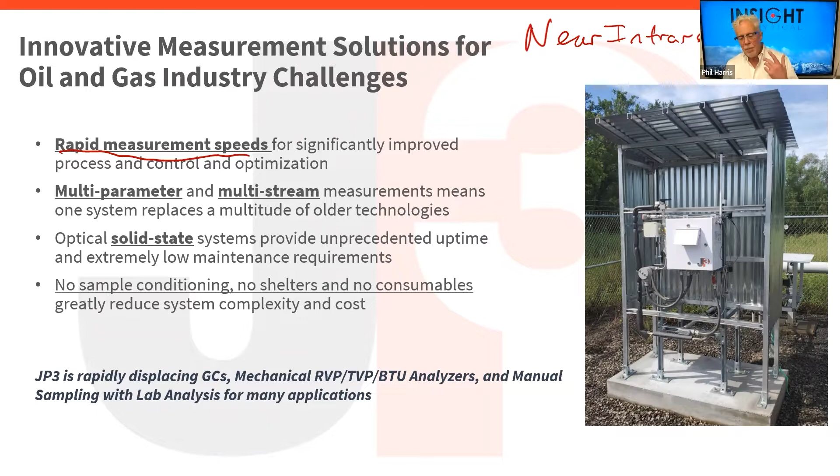It's capable of doing multi-parameter analysis, and this is especially important in that it can allow us to do chemical composition, much like we might think of doing on say a gas chromatograph, but it'll also allow us to do physical properties, where we might have expected to have to use a dedicated physical properties analyzer. So we can do both compositional analysis as well as physical properties off of one measurement, off of shooting one beam of light across one sample.

It comes down to using different algorithms. Also, because it's fast, we can switch streams quickly and do multi-stream analysis, so we can use one analyzer to do what multiple analyzers might typically have been doing.

It's all solid state, no moving parts except for one that's built inside kind of an IC, a tunable Fabry-Perot filter, if you like. So what it means is that it has no moving parts. There are no parts of the actual spectrometer that are in contact with the fluid, except for a flow cell that we're going to talk about in a little bit.

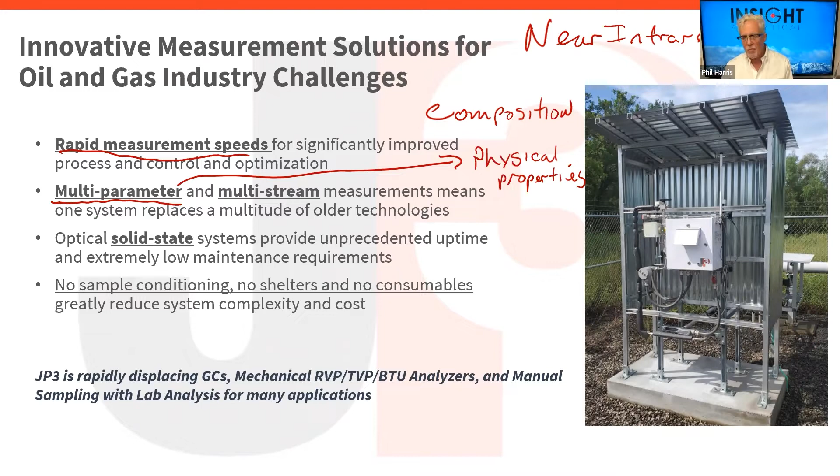The JP3 Verax family of analyzers are optical spectrometers that use advanced data processing techniques, what we often refer to as chemometrics—chemo coming from chemistry, metric coming from measure—using mathematical algorithms to look at an infrared spectra and pull chemical data, measurement data, out of that spectrum and allow it to be used for process control. It allows us to do a wide range of measurements in near real time and at process operating conditions.

So one of the important things to realize with this technology is we don't tend to have to put in things like regulators or control pressures or change temperatures.

We typically run the sample directly at process operating conditions. And what that means is, assuming the sample was single phase when it was in the process, it's single phase now when it's in our analyzer.

This is really important because in a lot of our traditional analyzers, we'll mount an analyzer building far away from the process, bring a sample over there, and perhaps do things to control flow rates, temperatures, and pressures. It's one of the things we commonly do in sample conditioning. But every time we have a temperature or a pressure change, we have a possible phase change as well. So by running at line conditions, we can try to make sure we keep the sample in the phase that we want to do the measurement in.

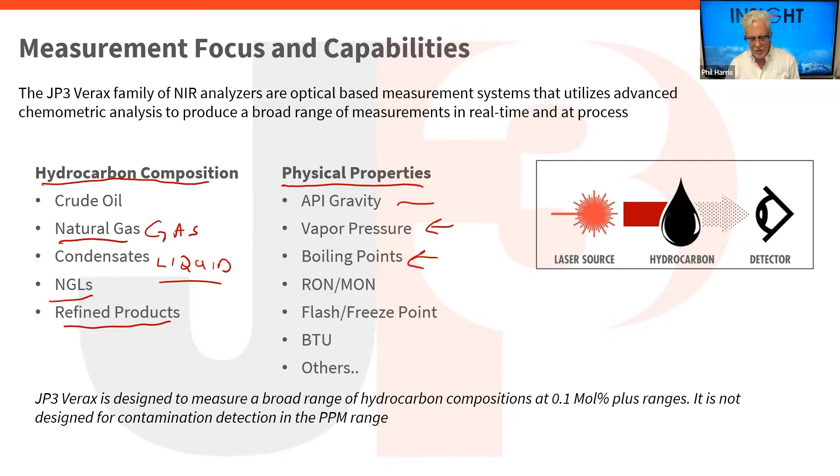So the way it works is we'll have a process line, some chemical process, whether it's a crude oil plant, whether it's product NGLs from a deethanizer bottoms, whatever. We have sample continuously flowing through that process line, and we look for some source of differential pressure. It might be something like an orifice plate.

So we have sample flowing through that process line, creating some differential pressure across that, say, orifice plate, or it could be a pump or a process filter. We use that differential pressure to drive process fluid through what we refer to as a flow cell.

This is where the fluid flows through essentially a stainless steel block that has two sapphire windows in it that we're shooting the beam of light across. We mount the analyzer someplace else, remotely, connect it to that flow cell via fiber optics, and shoot a beam of light over the fiber optics and let the beam of light come back to the analyzer. So I usually refer to this as being the brains of the whole device.

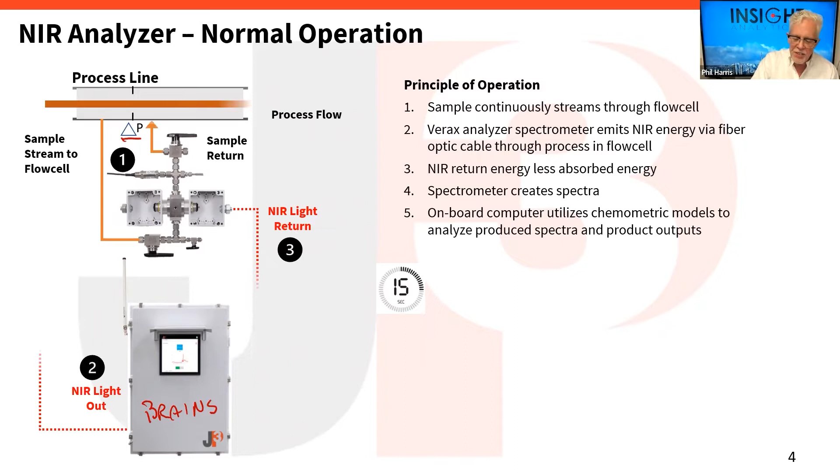The important thing to realize is that any process fluid leaving the process is returned right back into the process. We can mount this close to the process because it's going to run at process line conditions anyway, so we may as well have it as close as possible. That lets the fluid flow quickly, and no fluid flows over to the analyzer. So wherever we put the analyzer, we don't have to worry about things like toxic gas detection, or carrier gas and oxygen deficiency.

It allows us to put that analyzer at some place like an MCC building or a control room. The onboard computer then looks at the light that comes back and makes an analysis. So essentially what we do is take the spectrum that comes back—this is the NIR spectrum. We take that near infrared spectrum, run it through the algorithms we've built into the analyzer, run it through the models we've built, and use it to predict chemical composition.

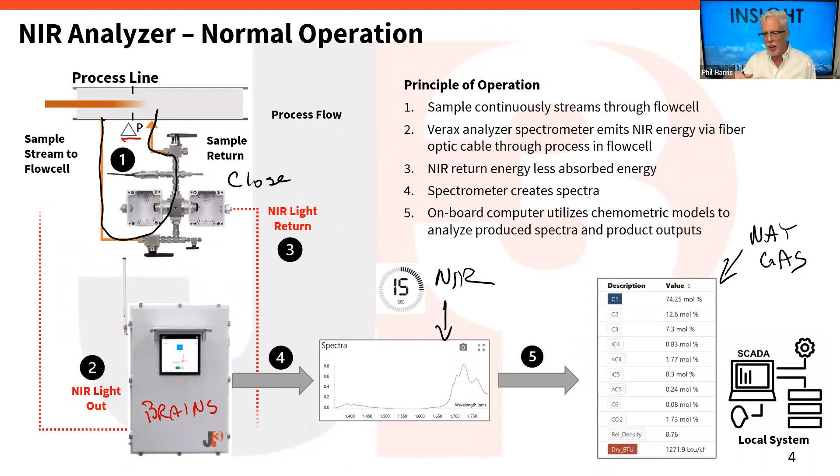For example, in this case we've shown a wet natural gas type sample. But it could be crude oil, condensates, NGLs, refined products like gasoline. Since one analyzer can handle multiple flow cells, we can put one unit in and have different flow cells measuring different things in different places. One flow cell might be measuring a natural gas sample, another a crude oil sample, and still another a natural gas liquid.

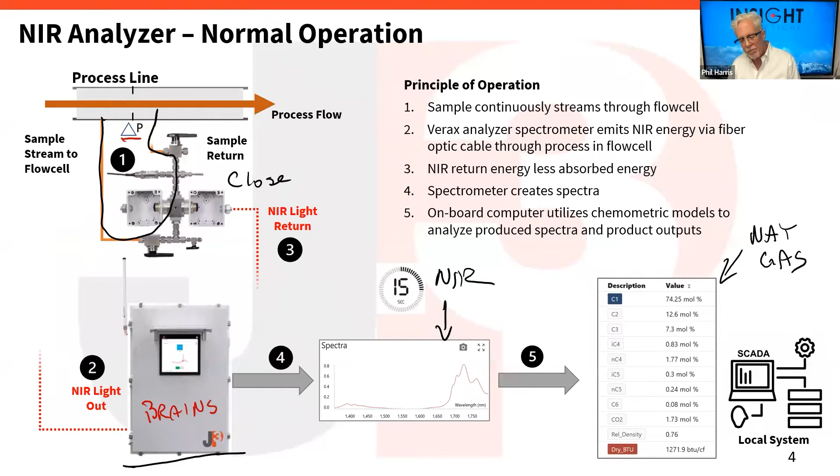We can have up to 4 process streams on a single analyzer. This one has one spectrometer and switches which set of fiber optics the beam goes out to. Each of those process streams we can be doing different analysis on. We may be doing distillation curves and vapor pressures on one measurement point, cloud point or freezing point on a jet fuel being produced at a refinery on another, and still another point we could be looking at the gas phase overheads of a distillation tower.

All that data coming in, the results of the analysis, is communicated out to the plant's distributed control system or SCADA system via Modbus over Ethernet or via Modbus over serial.

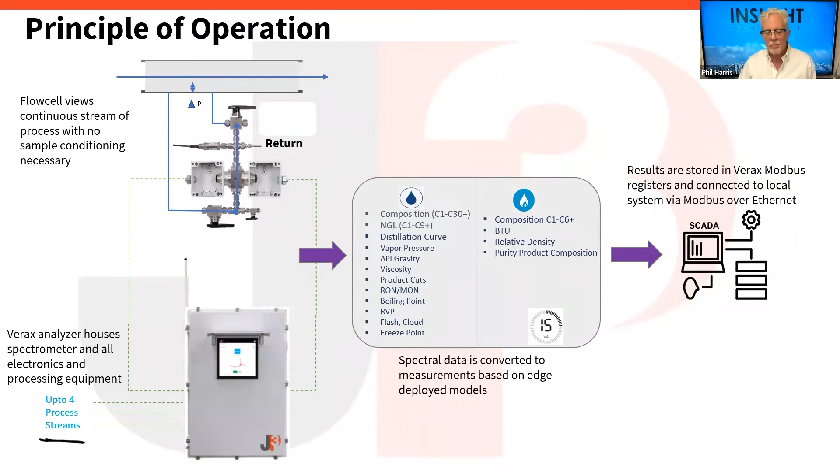Typical applications include gas processing and natural gas liquids plants. So we can look at...

Yeah, we have a question in the chat: is the sample homogeneous during extraction of the sample cell? Generally, the sample probe must be 1/3 to 2/3 of the pipe ID for extracting homogeneous samples. We still have requirements for finding a good sample location. Generally we want to be a few pipe diameters away from an obstruction, sampling in that central third region of the pipe. We'd like to ensure the sample is well mixed, so in some cases we may recommend a static mixer upstream so we get a well mixed sample. That ensures we get a sample representative of what's in the process.

We can use this in gas processing facilities for things like condensate stabilization, for looking right across an entire fractionation plant. The beauty of this is we can do both gas phase samples and liquid phase samples—we can look at the liquids in a tower bottoms and the gas phase in a tower overheads with a single analyzer.

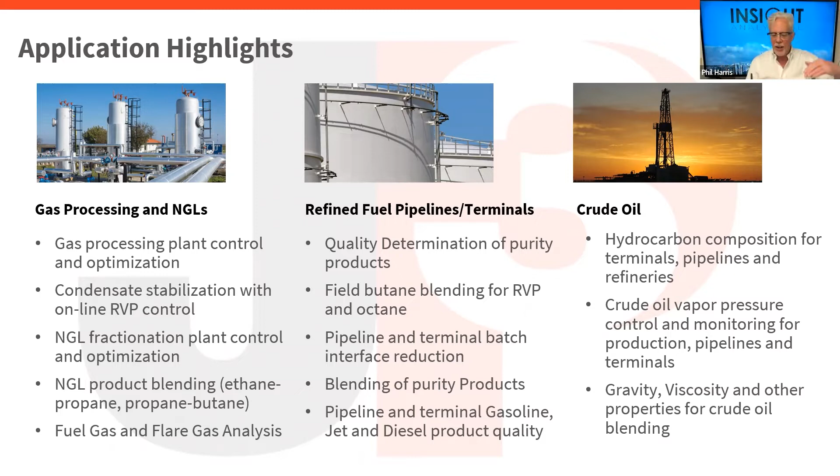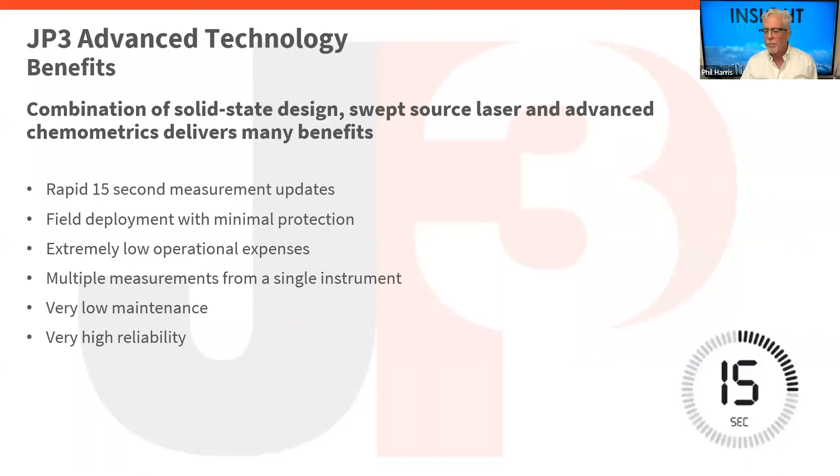On the gas processing side, we're going to focus a little bit for a while. These have commonly been used to optimize natural gas and NGL processes from production, looking at what's coming in on plant inlets all the way up to final products. We want to look at natural gas production, BTU spec especially, or pipeline specs for rich gases, gas processing plants, fractionation, and blending.

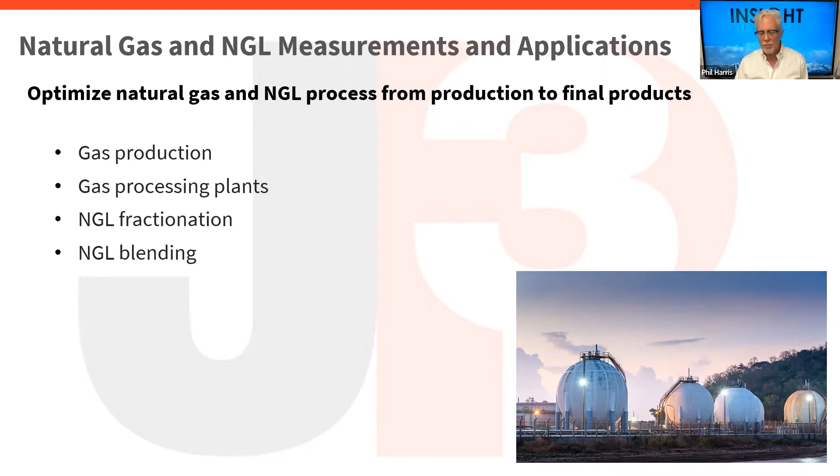Common applications we see in gas plants are going to be...

I'm going to jump in on that question just in a minute. I'll finish the slide and I'll jump to that question.

We've used these a lot in natural gas processing facilities. Everything from doing BTU analysis and C1 through C6 plus analysis on the gas phase side, to NGL liquids composition, vapor pressures, condensate vapor pressures. We can handle very rich gases that can sometimes be difficult because they're right at their dew point.

We can get a hydrocarbon dew point and bias the results if we let them cool off. But because we measure right at line conditions, we're measuring the same phase that's there. We do gas plant condensates, what some people refer to as natural gasoline, C5 plus streams, Y grades and NGLs. So it's things like deethanizer bottoms, depropanizer bottoms, debutanizer bottoms. Fast measurement works great in cryogenic separator type applications, and again, we can look at overheads and bottoms with a single analyzer.

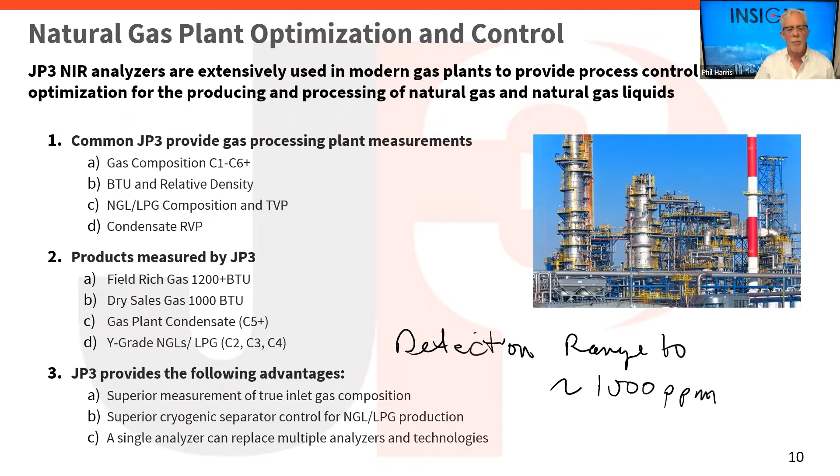So the sort of applications we can look at is any kind of fractionation vessel. If we've got a distillation tower or a condensate stabilizer tower, we can be putting sample points from the JP3 on the inlet or on multiple inlets to that tower, on the bottoms product, and on the tower overheads. So we can have one analyzer that's looking at all of the streams feeding this unit, and also all of the product streams, attempting to provide information for both feed forward control, changes on the inlet side, and then looking at product quality, changes on the outlet side, and allowing us to adjust the operating conditions, process control back, feedback back to that cryo unit, whether we're going to adjust temperatures, pressures, relative flow rates from different feed streams.

Once we have all that data about what the product coming in looks like and what the product going out looks like, now we can start to do optimization. And that's where the inherent value comes, because if we can optimize it and say the liquids product is the most valuable one to us today, we can adjust the operating conditions of that cryo unit to try to maximize liquids production. Or similarly, we can say we want more slipping to the gas phase if our goal is to produce increased natural gas volumes.

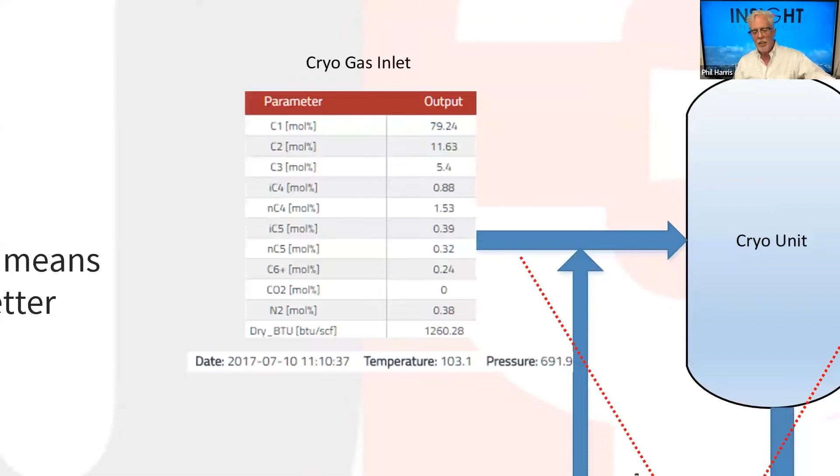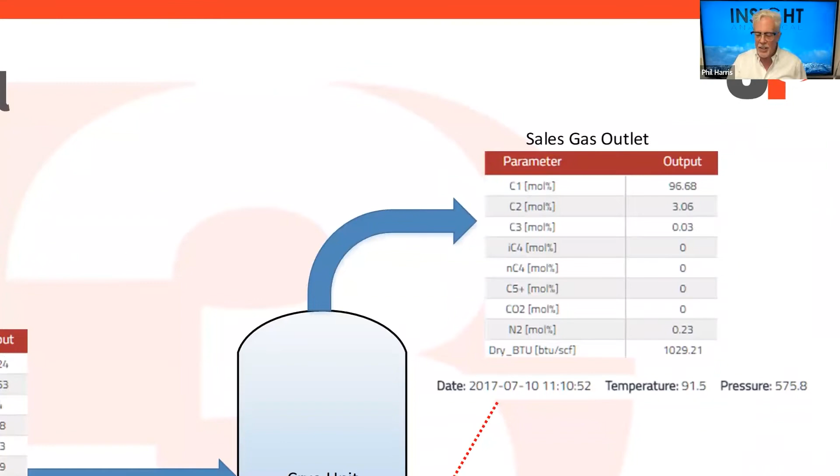So I'm looking at the gas phase coming into this cryogenic unit and doing an analysis of that. I can have a vapor pressure analysis on one stream, I can be looking at my sales quality natural gas, and as you see here, we're down in that 0.03% for the propane in this stream.

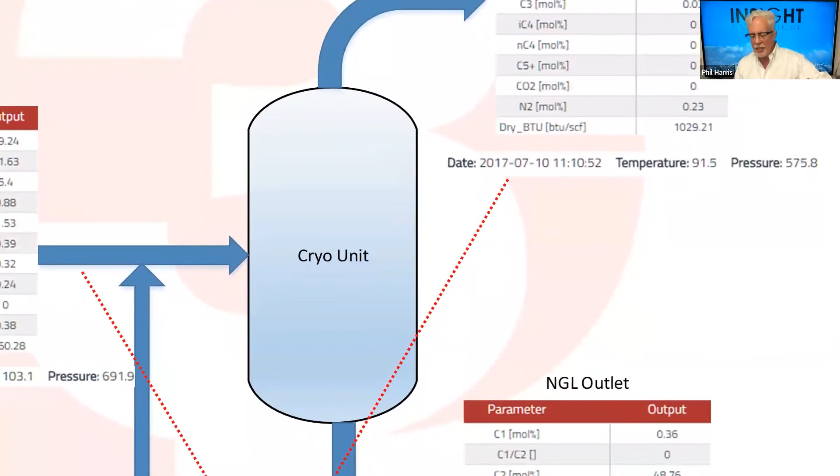So on gas phase, we can tend to go a little bit lower in concentrations. Liquids is going to be more difficult. And then we can look at the full liquids analysis on that NGL bottoms. We don't need any modification for liquid analysis or gas analysis - the same simple flows will be used for both. The only difference between typically what we use in a liquids analysis and in a gas analysis is...

Gases have lower molecule densities, so we use a little bit longer flow - we put a larger gap between the windows in the flow cell to give us a little bit longer optical path. But the JP3, the brains part, is identical to all of them. It sends the same beam of light out over the same fibers. The only thing is, for gas phase applications, we often use a 1 centimeter flow cell, and for liquids, we use a 0.2 centimeter flow cell.

And we don't have any restriction about the inlet temperature and the pressures, only from a certifications perspective. The flow cell is rated to 1500 PSI. And the standard flow cell - in Canada now we have some special boiler safety requirements, so a standard configuration for us is 1500 PSI and 107 degrees C.

In the IEC version, because you don't have what we have - a special Canadian boilers code, pressure code - in the IEC versions you can go to higher temperatures than that. It comes down a little bit to how high a temperature the fiber optics are rated for. The high temperature cells, I don't remember off the top of my head, 160 C? Yes, the 500 degree F. So yeah, high temperatures, high pressures.

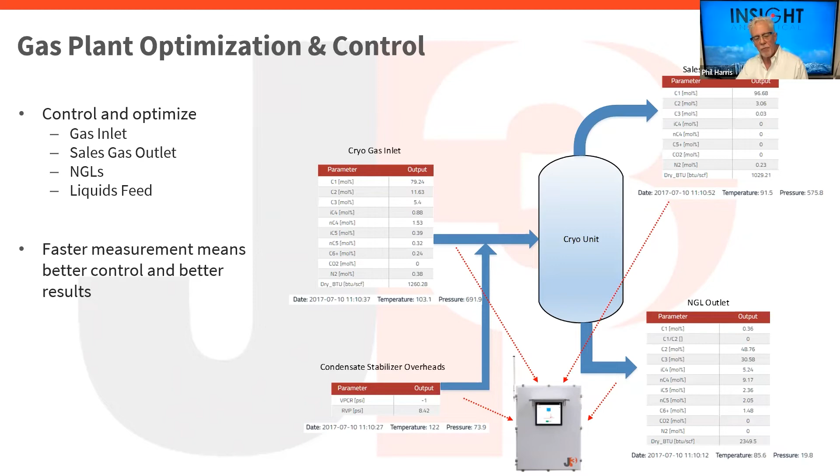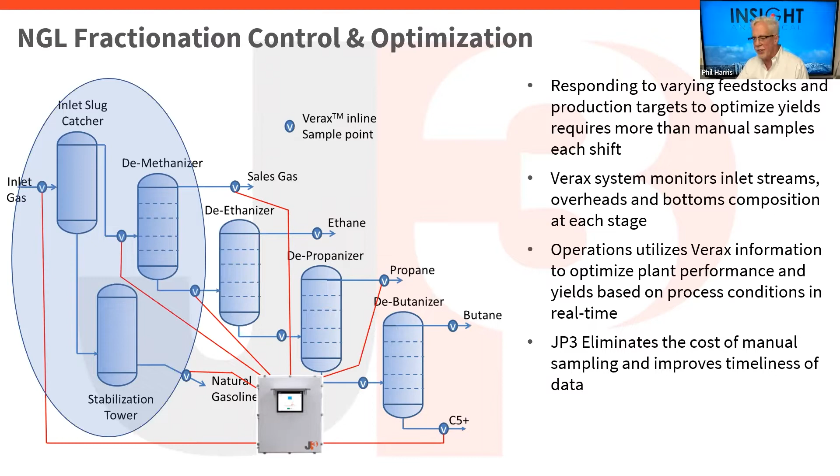So again, this allows us to put one analyzer looking at multiple different liquid and/or gas phase streams within a plant. We can look at everything from inlet gases to tower bottoms to tower overheads, final product. As we're going to talk about, we can even look at the fuel gases going to a burner - fuel and flare gases. This allows us to do things like NGL blending, so we can often slip some ethane in with our propane.

I think it's 107 degrees C stream temp for the flow cell, isn't it, Mohit? And typically there's two versions of the analyzer: a single flow path, so one stream - there's a version that only does one stream, really useful for something like a crude oil blending skid - or there's a 4-stream version that allows us to measure at 4 different sample points.

Yes, I think the high temperature one is more than 100 degrees C. You're right, I think the high temperature one is closer to 230 C, and the standard I thought was 107, but at least that's how we saw them in Canada. 232F and 500F, I thought were the common two temperature ranges.

So we can get an uplift, an increase in our propane volumes if we can blend some ethane in there, as long as we're meeting specifications. So what we want to do is run as close to the maximum amount of ethane in there. Since ethane doesn't sell for as much as propane typically, we are going to try to blend as much ethane into that propane as we can and still meet specifications.

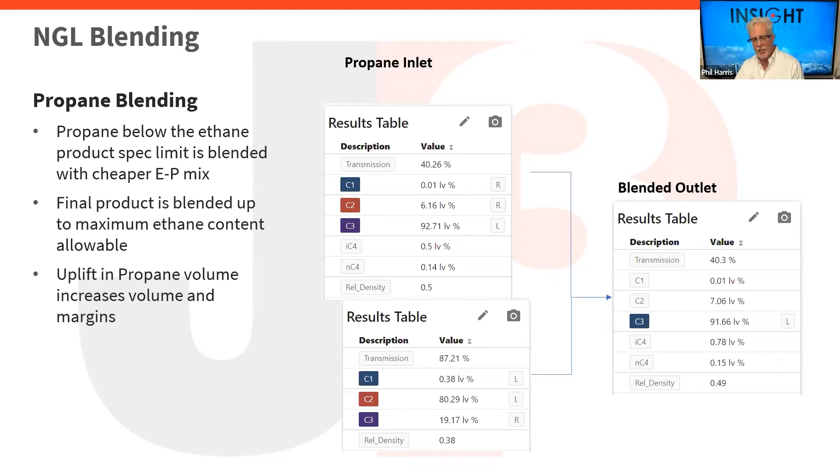And so this gives you an idea of some typical ethane levels and propane levels that we see. This is a deethanizer bottom for an application we have here in Canada. So what I typically plot is on the x-axis the lab values, and on the y-axis the NIR.

What we see here is an excellent one-to-one correlation between what the NIR analyzer gives us and what the lab gives us over a wide range of concentrations, going from as low as 2 liquid volume percent to as high as 9 liquid volume percent for the ethane analysis.

At the same time in that stream, we're measuring the propane. The control variable here is typically the ratio of ethane to propane. We're going as low as 55% to as high as about 74% on the propane. When we compare the NIR results to the lab, on the ethane we agree with the lab to within about plus or minus 0.2 liquid volume percent.

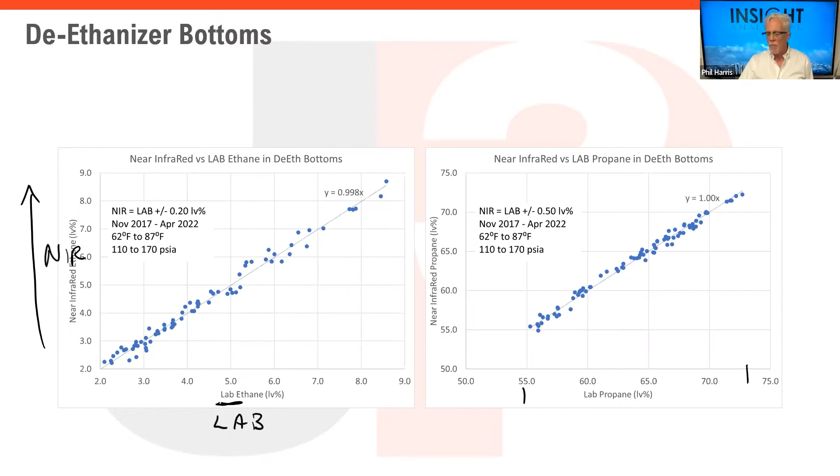Actually, I'm working at a polyethylene plant, and the reactor is far away from the purification site, so we have the main analyzer close to the reactor site. But sometimes there's a switch to the feed stream from battery limit, and that stream is far away - around 300 meters from the analyzer. I don't know if your analyzer could measure this within 300 meters or more. We have many streams, like 4 or 5 streams coming from different locations of the plant. If it is, as you said, that because of pressure drop, maybe it will not be very precise - so how precise will it be if we have 300 meters or more? Can you specify the distance?

Sure. I think the longest fiber installation we've done, in Canada, was 1,100 feet - so that's about 340 meters or so. We can run the fibers for a very long distance, but the type of fiber we use is relatively expensive, so ideally we like to try to keep the fiber length short.

But if you were in a situation where you had, let's say, vessel number 1 and vessel number 2, or plant inlet - maybe this is my inlet, and this is the vessel I normally want to measure - if we could mount the analyzer part in between, then we end up with about 150 meters of fiber going in each direction, and that would be fine.

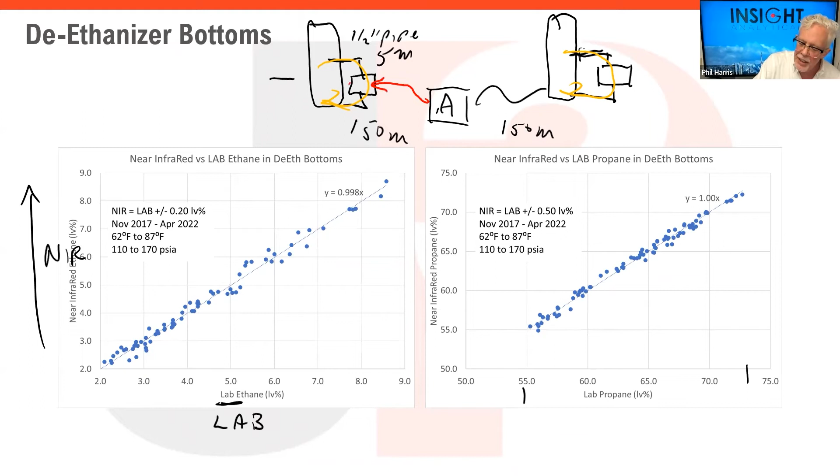And then to each one, we would have a fiber that goes out and shoots a beam of light into the flow cell, and then a fiber that comes back and brings that light back. Same with the other one - a fiber that goes out and a fiber that comes back.

So we would have piping to get liquid over to the flow cell, mounting the flow cell close to the process, so again we don't have much pressure drop along the lines. They're nice big diameter, so they don't plug easily. In polymer plants we sometimes worry about plastics forming in our transport tubing and starting to plug off our lines. If we can keep them large diameter with relatively high flow rates, and don't let them change temperature from the process, then we don't get as much plugging.

So we run this continuous flow through the sample cell, send a beam of light out on one fiber optic, pick the light up that went through the sample, and bring it back over to the analyzer. Okay, is it clear? But actually what we have is stainless steel piping for 300 meters, it's not a fiber. Okay, fiber - okay, yep, yeah, this is what we have.

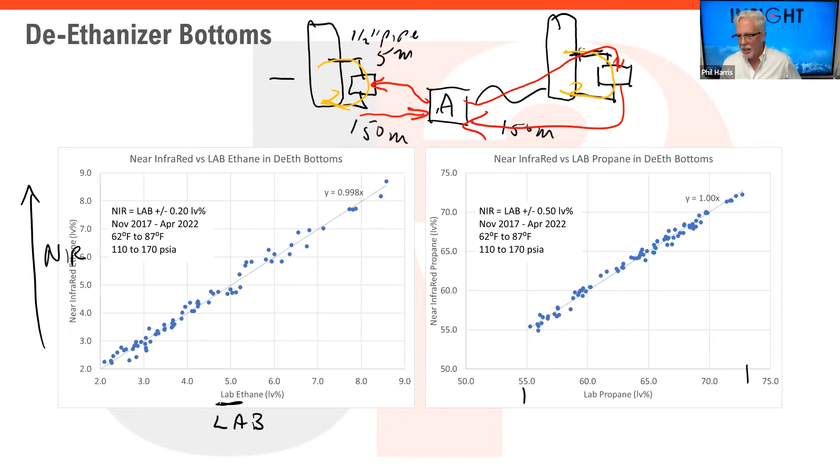So you already have that - okay. So then your concern, I mean my concern when I hear of 300 meters of sample piping, is always: does it stay single phase all the way along there? That's a really long sample transport line. Yeah, it's very long, yeah.

You have to be concerned about, at the flow rates you're at, how long does it take to get through that line? And do you still have a representative sample by the time you get to where you want to do the measurement? Actually, we have doubt in those results - because of this I am asking this. Yeah, I would doubt it too, sorry to say.

Especially because distillation towers are hard, right? Anytime we're doing a gas-liquid separation in a tower, the liquid at the bottom is generally very close to or right at its bubble point, and the gas at the top is right at its dew point. So temperature and pressure changes along the way can cause us to get phase changes.

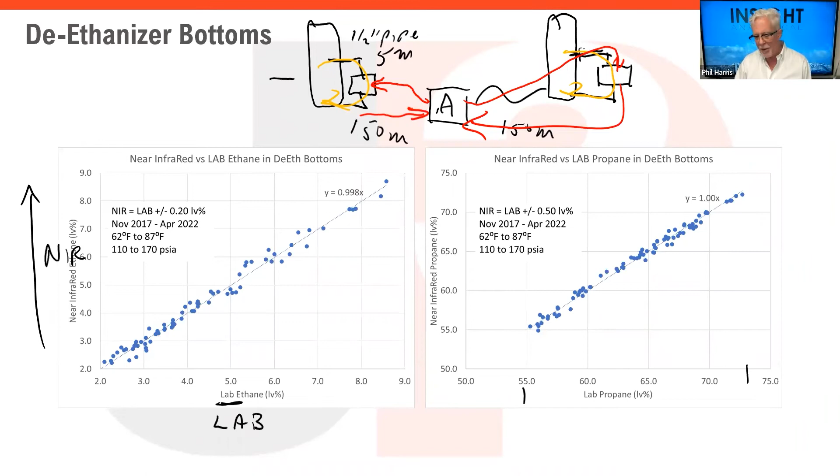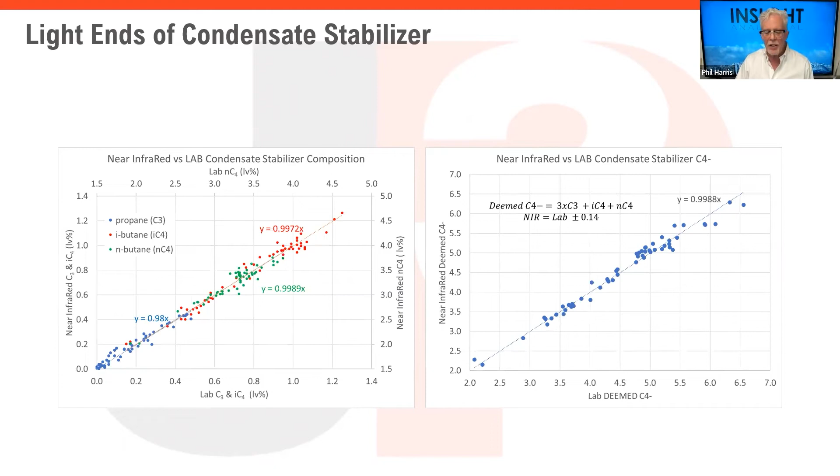So again, we can use the analyzer to look at, let's say, the bottoms of a condensate stabilizer. In this graph, we're using the near infrared analyzer to analyze the C3 and C4 hydrocarbons in the stabilizer bottoms. The x-axis is the lab results, showing different ranges at the bottom and top. The C3 and IC4 were varying between 0 and 1.4 liquid volume percent, and the NC4 was varying from about 1.5 to 5 liquid volume percent.

The blue dots are the propane - you see those all clustered down between 0.2 to 0.4 LV percent. You can see we tend to be conservative when we say we can only go down to around 0.1%. A lot of this data is still quite good on the propane side, down below 0.2, 0.1 liquid volume percent - it's just that our precision isn't as good as we get to really low concentrations.

The red dots are the isobutane, and it varies from as low as 0.2 LV percent to as high as about 1.2 LV percent. You can see the near infrared analyzer results on the y-axis on the left-hand side. Again, we get great correlation between the NIR results and the lab methods.

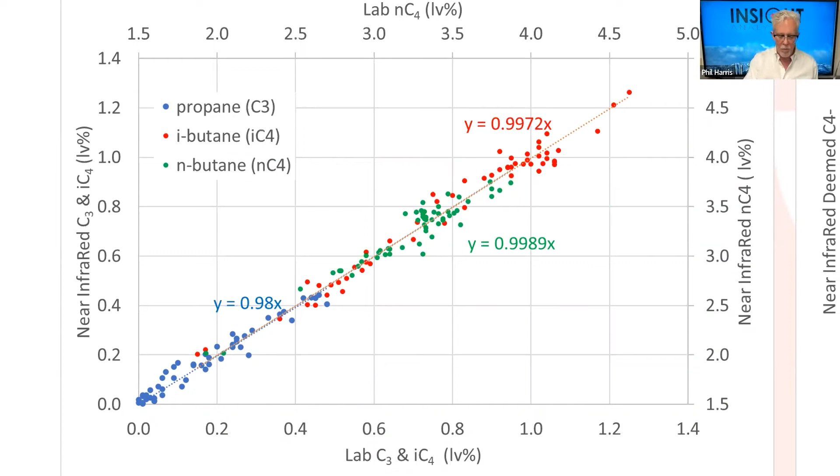to get the most efficient, lowest emission burn from this fuel. So we can use the analyzer to do a complete fuel gas analysis and optimize burners in compressors and power plants.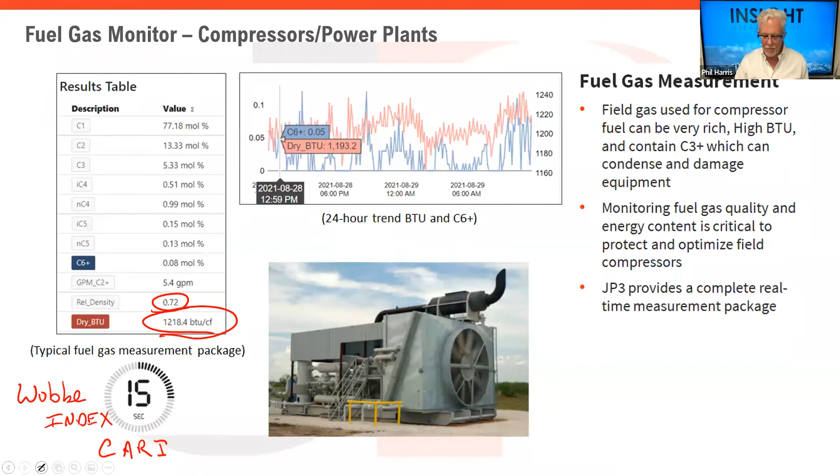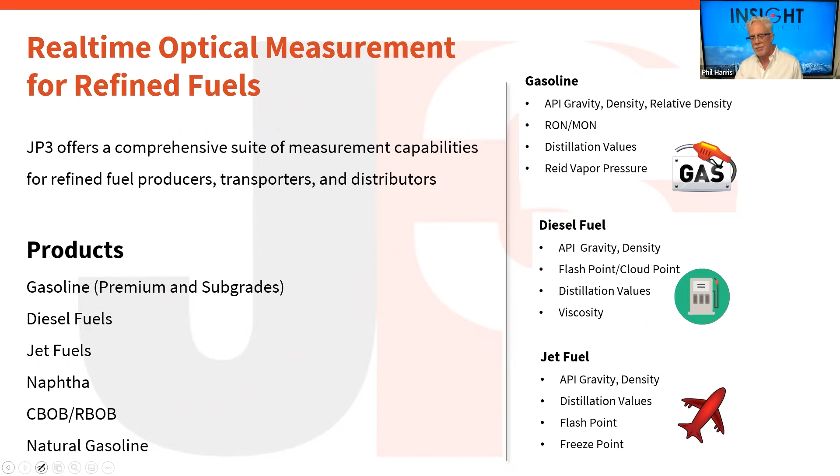This allows us to do applications like blending, where we want to add butane into, let's say, our gasoline. Butane is generally a lower value product than gasoline. If we can add butane in and still, for example, meet our vapor pressure specification, it allows us to basically increase our production volume of the gasoline by blending the butane in.

I will note as well that this graphic that's shown here - oh, great question, Paul. I had a slide right at the end that shows the certifications. Yes, ATEX, IEC, and CE mark for sure. Class 1, Zone 2. The flow cell part is Class 1, Zone 1. But I've got a slide right at the end that shows the actual cert.

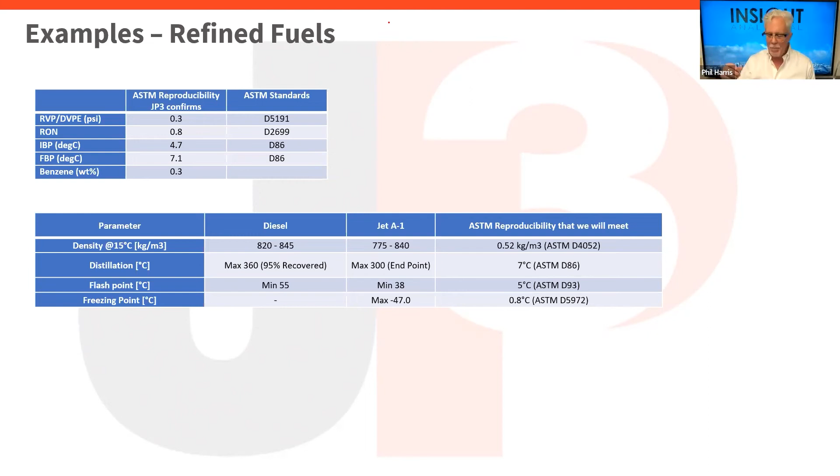Regarding the Bartec Benke, if we're thinking about vapor pressure, it's a traditional true vapor pressure analyzer with a movable piston. The problem is it's got very tiny tubing and moving parts that work well on clean samples. But with samples like vapor pressure of crude or condensate stabilizer bottoms, which are more likely to have sand, clay, asphaltenes in them, anything with moving parts that relies on tiny, tight precision O-ring seals with moving pistons generally needs a lot of maintenance. My understanding is that Bartec has said they won't sell their vapor pressure analyzer now for crude oil applications, only for refined fuel applications, from what I've heard.

I'm not sure if anyone wants to corroborate that.

Generally, we like to see it in a building that has some temperature control. Depending on the ambient conditions, you may just want to put a sunshade over it. So the question was whether it requires cooling - no, you don't have to put a Vortex cooler on it or anything like that.

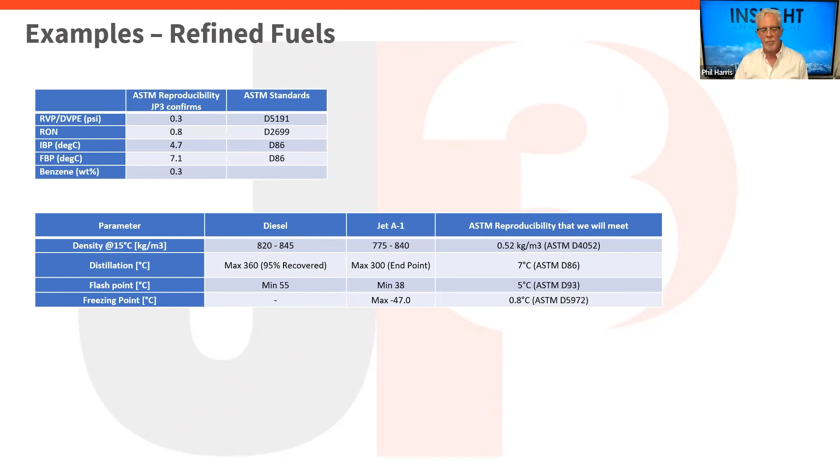Another interesting application for the JP3 is looking at pipelines where we have different fuels going down them. You're very welcome, thanks for the question.

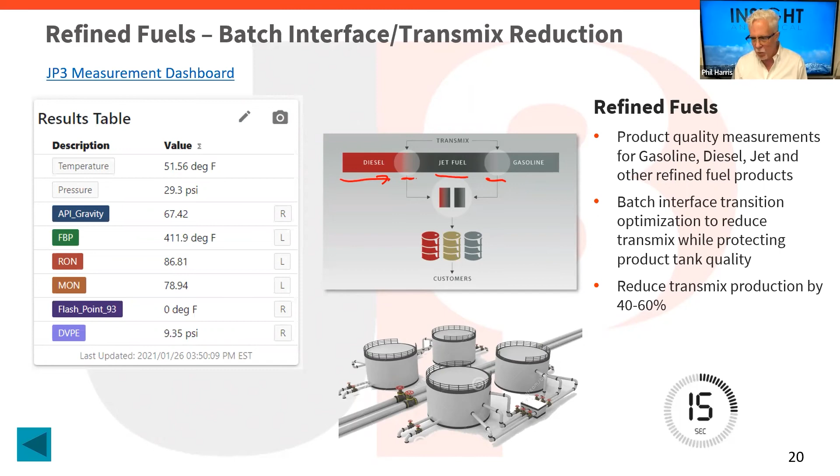In fact, JP3 recently has been awarded a patent on advanced interface detection software.

I'm afraid I'm not great at octane boosters and blending, so I don't know. I would imagine if they built the model around it, maybe one of the JP3 guys can comment. I'm again more on the Canadian side - we tend to produce a lot of hydrocarbons but have less on the refining side. The US side has, of course, got a much larger refining side. I'm afraid I don't know about blending in an octane booster like N-methylaniline.

So what we're trying to say here, Phil, is that if we don't want to have the whole modeling done for octane numbers, flashpoints and all, we can still, using the AI modeling, detect whether it's a clean product like a premium, a diesel, or an interface or no-interface condition. Yes, that's what this new model does. Yeah, but there was a question in there about octane blending though.

The AIDA, the advanced interface detection, lets us see interfaces without having to build a model for each of the products. So what it allows us to do is let the device almost self-learn, if you like.

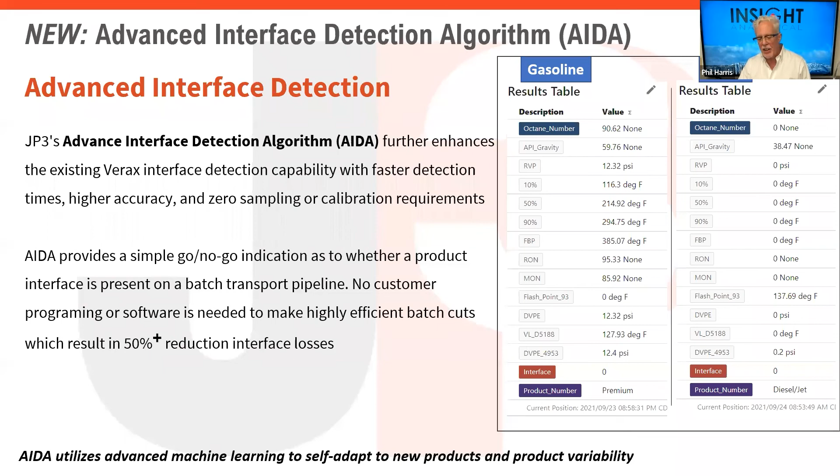So it allows us to do that clustering and interface analysis, if you like. And so we can tell when we're on spec for this group of products, say the premium sits in one cluster, this group sits in another cluster, this in a third cluster, and we can tell which product it is, or when the transition is happening in the region where we're not on spec for one product or the other.

So we can use AIDA again to do transmix, but it becomes less modeling intensive than if we're trying to do the transmix based on, let's say, looking at the octane numbers or whatever.

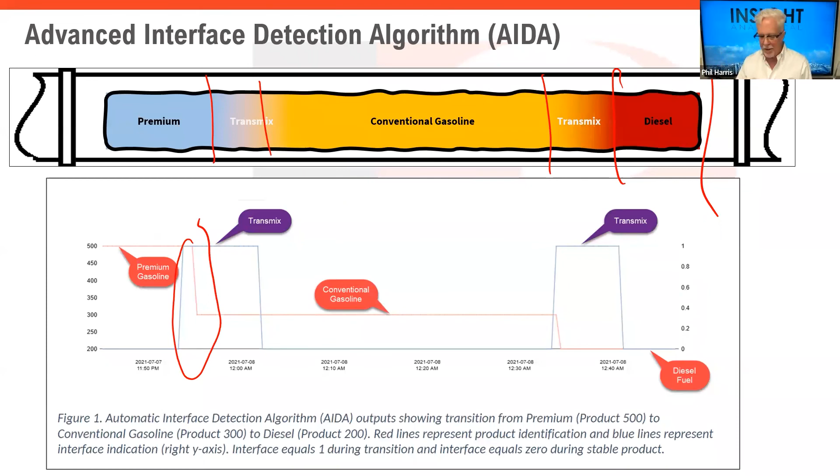If we're having to boil out some of the light ends in a heater treater, rather than running it on manual controls and having the temperature go up and down and the vapor pressure constantly changing, we can measure the vapor pressure, put the analyzer as part of a control loop, and optimize the temperatures, and run a more stable product.

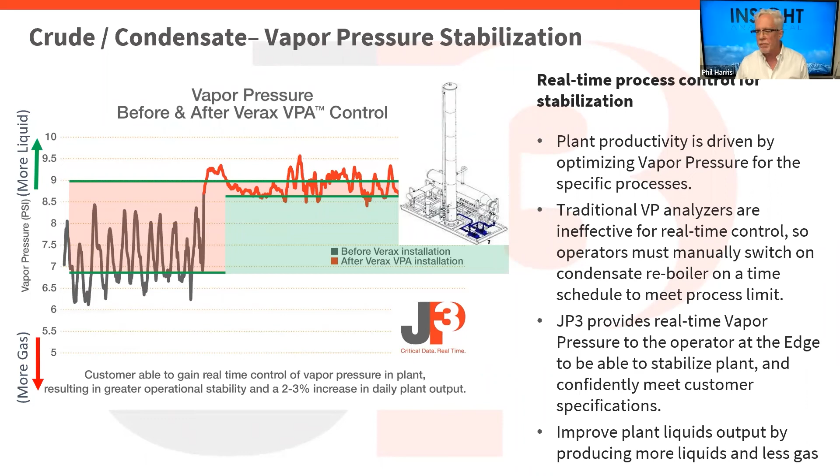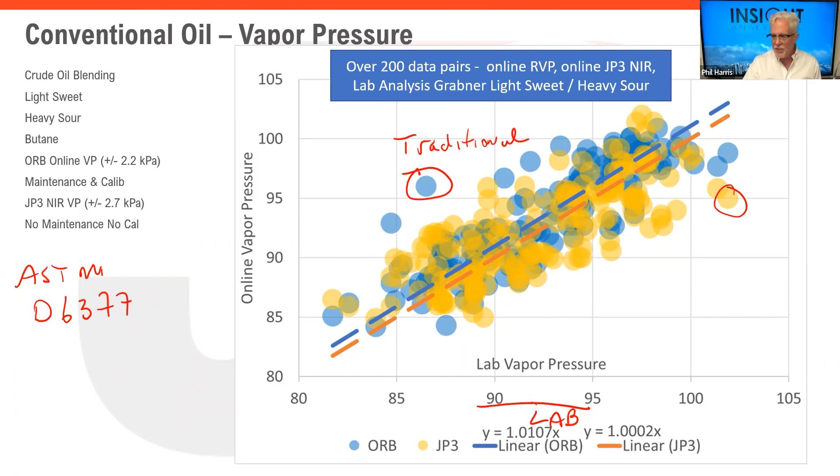What we see is excellent correlation between the lab and the JP3 results, and the JP3 and the traditional online analyzer results. The big difference, though, is during this test, which ran over several months, the traditional online analyzer was getting continuous maintenance, weekly calibrations, weekly maintenance, and the JP3 we didn't touch. So the advantage of this is that we can put an analyzer in and not have to do a lot of maintenance along the course of time that it runs.

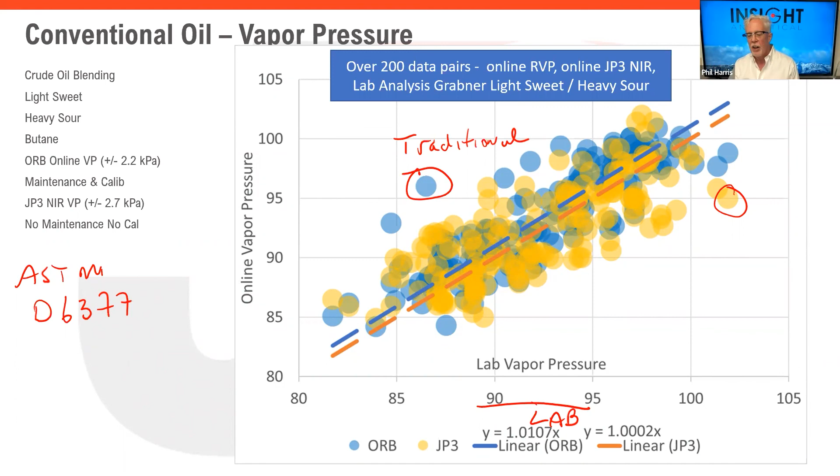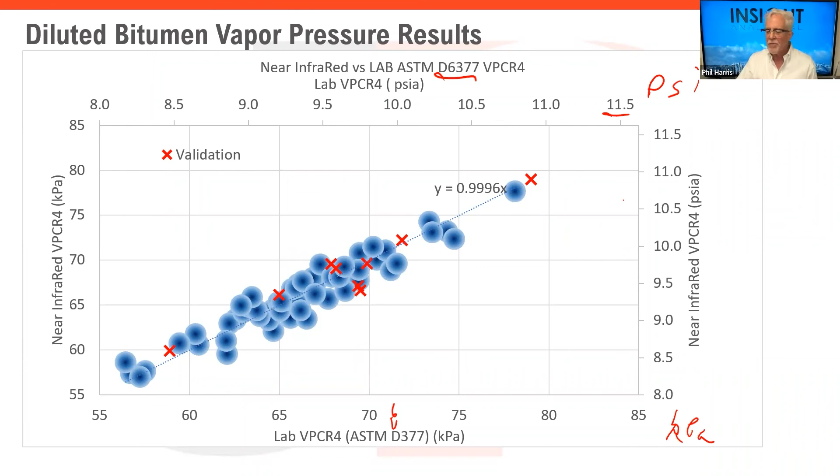This question about certifications: the new Verax ISX and IMX are out. They have full European certifications. So, there is our certification information.

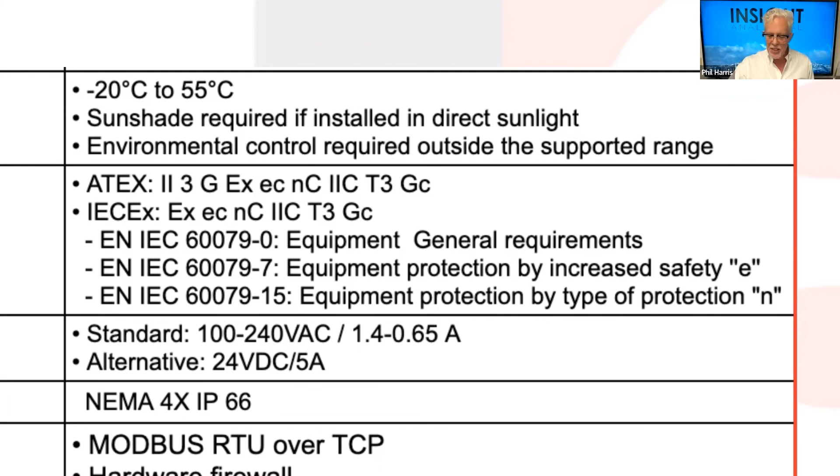So this is for the electronics part, Zone 2C. The typical operating voltages are 100 to 240 volts, with 24 volt DC capabilities. The cabinet itself is IP66, NEMA 4X, with communications RTU over TCP or serial.

Again, you can use this in a wide variety of applications. I just gave you some application information at the bottom. About to wrap up here, sorry for running so long.

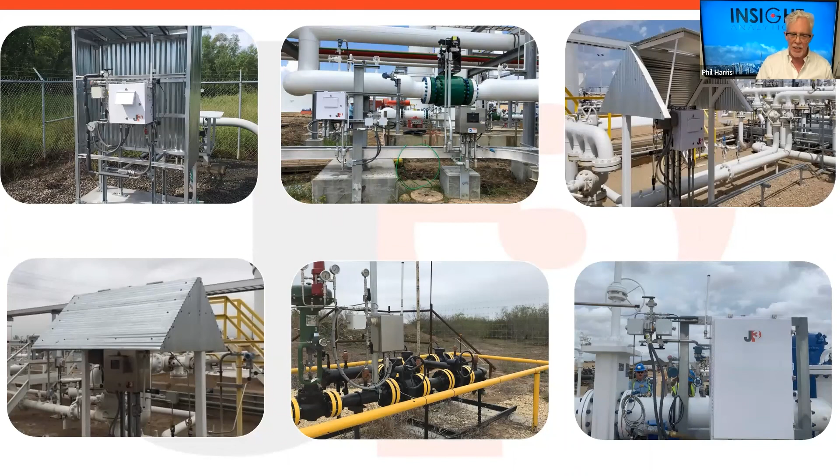Some typical installations, you'll just see these get put outside, but certainly in the US and Canada, because we get to -40, we put them inside of any available building that we have. And that wraps me up.

If you have any questions, Mohit, who is here and has been answering some of the questions, is available and in the Middle East. You can get more information from jp3.com. I've done a number of webinars about this technology for some of my colleagues in Canada and the US, and we have a full YouTube.

Paul, good question, I'll answer right away. We have a full YouTube channel with a bunch of the webinars we've done, so feel free to check out Insight Analytical Solutions on YouTube. If anybody wants to contact me, my email is there.

Can we do water in crude? Generally, no, typically too low a concentration. Oftentimes the water cut we're looking at, at least for here, is typically less than 0.5%. And water has this big, broad, mushy NIR absorption that doesn't give us good quantitative results.

We certainly have been in situations where we've contacted clients and said, we're looking at your spectrum, it looks like it's wet. Okay, so when it comes to inventory management of a tank farm, okay, and any given tank farm.